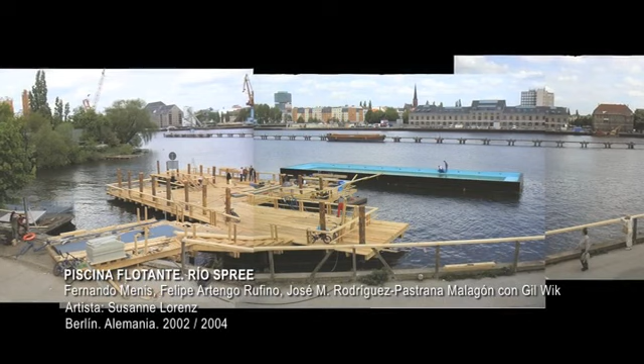The floating pool on the river Spree in Berlin recalls the old public enjoyment of the river through precisely the recycling of a barge for transporting coal.

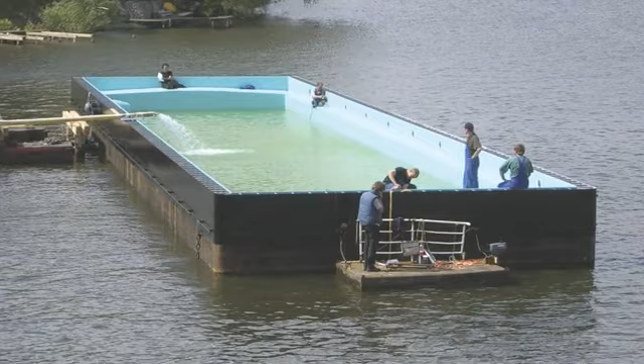As a first drop of clean water, the project reopens the possibility of swimming in the Spree, returning to an old tradition.

But perhaps it is in the conjunction of the House and the cultural space El Tanque where the reuse of materials acquires its meaning in a more accurate way.

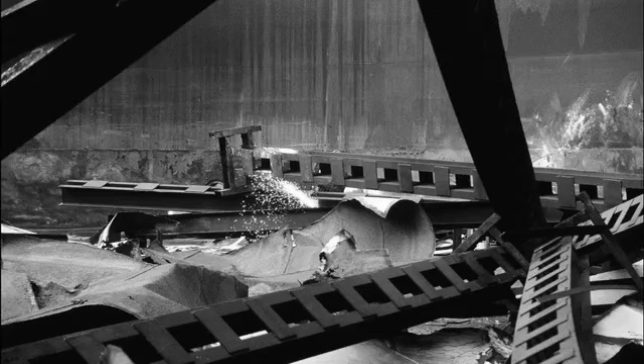The House building is done during the conversion of a gas tank of the refinery Cepsa into a cultural centre. Next to it, another tank is being dismantled, producing a large amount of waste. Fernando Menis decides to use this waste material in the construction of the stairs of his home.

The characteristic facade of the House, designed to look at the maritime city and breathe gently its air, has adjusted to the power of the sun and the breeze.

Nearby, the cultural space El Tanque is a good example of how the recovery of industrial elements enhances the scenic quality of space, amplifying the feelings that seize the viewer.

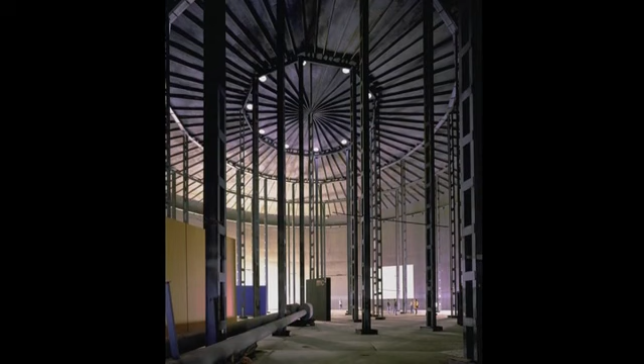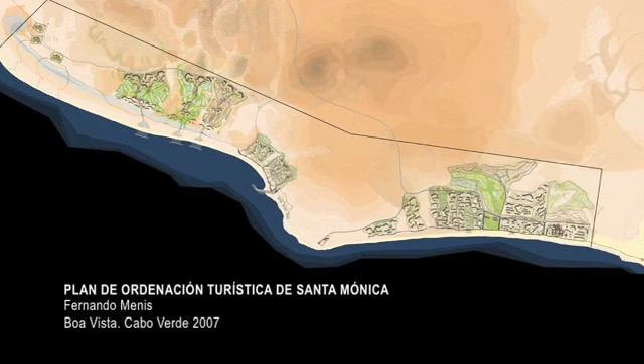The renewal of energy and matter takes on special meaning when it comes to reactivate economic places and processes related to tourism.

The project for the coastline of Puerto de la Cruz examines the current from the Atlantic to use its energy in the renovation of the harbour.

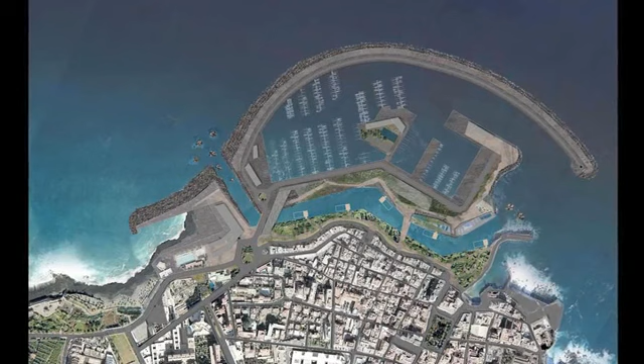An arm of the sea, the Canary Current, flows through the project area, reviving the area's tourism potential and increasing the quality of life for its inhabitants.

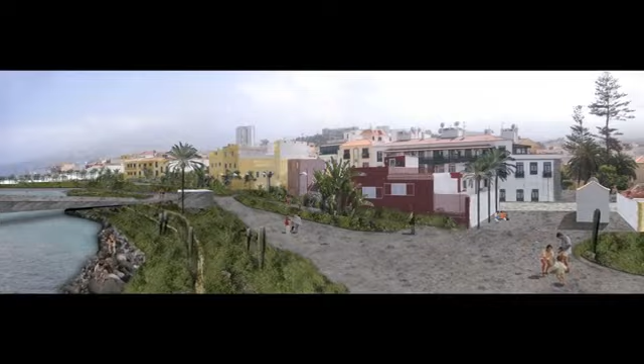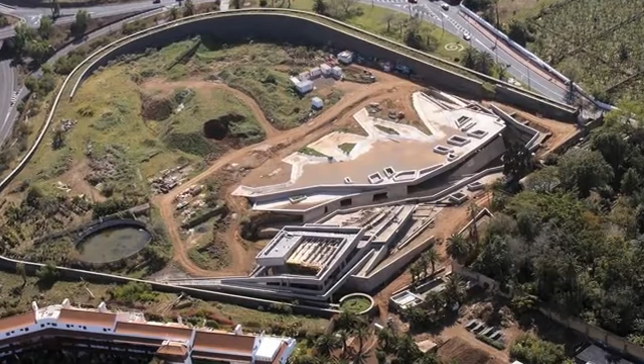The Botanical Garden in La Orotava, now under construction, will reactivate the surrounding urban fabric, completing its scientific character with other functions such as cultural, promotional and socio-cultural.

The treatment of topography also plays a key role in the project for the park Cuchillitos de Tristan. There is a pre-existent formation of rocks that is going to be used as a mirador, allowing matter to slide in a volcanic casting.

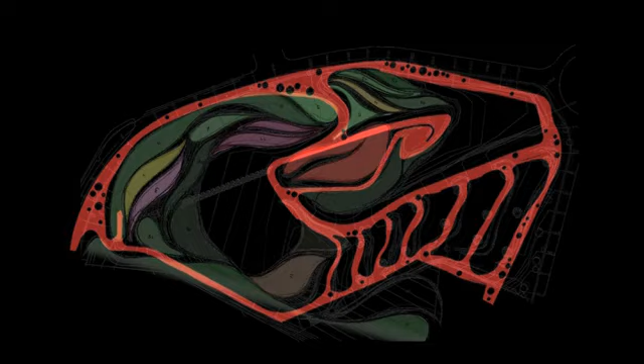Creating platforms that bridge the gap using a winding descent.

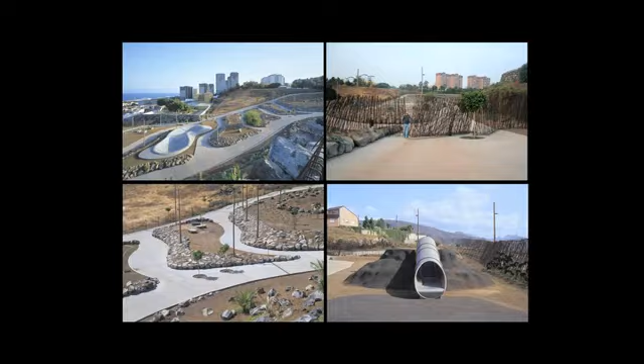The project for the new Sacred Museum in Adeje aims to the remodeling and expansion of the Plaza España, designed as a bridge between the social fabric of the village and the surrounding natural landscape.

The square is conceived with a clear visual and functional relationship with the ravine. Its role in venue is complemented by a permanent stage with the landscape as a background, giving it a great potential attractor both for citizens and visitors.

Are emphasized here once again the values in the context, advocating for quality tourism that fosters economic growth through alternative activities to those offered on the coastline.

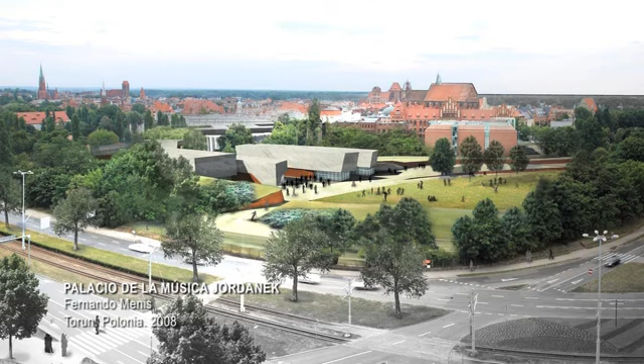For the auditorium in Toruń, Poland, the use of materials is the key to understanding the project. The plot is on the edge of a bucolic historic centre built in brick and limited to the redevelopment of the city.

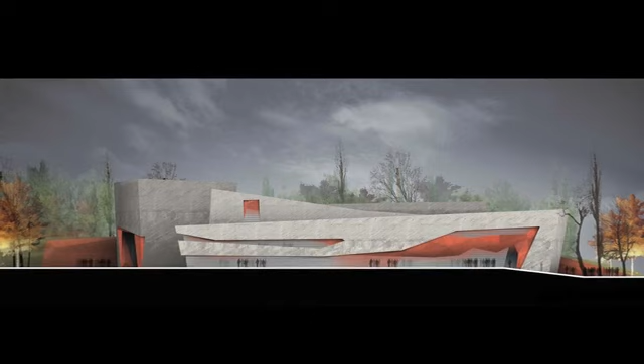The fusion of old and new is resolved through a brick lining and a rigid outer skin of concrete, very clear, which leaves holes in the interior that might appear organic like a crystallized magma.

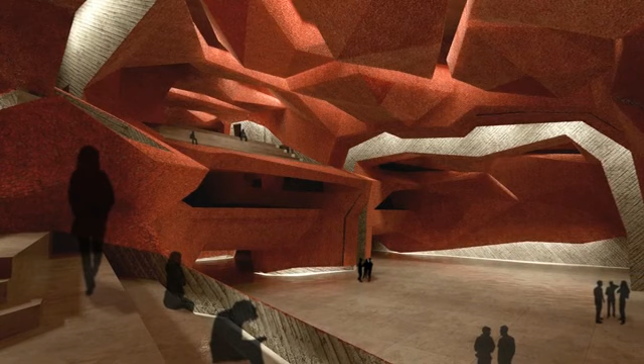The facade reinterprets the tectonics of the city and draws a parallel with the strategic location of the plot.

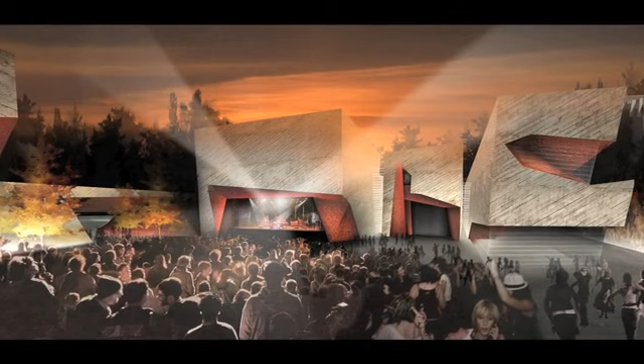Aurum House in Taiwan, in the AODI district, consists of two distinct volumes made of stone embraced by the land. Its strong presence is complemented here by geometric materiality, seeking the deployment of sensations.

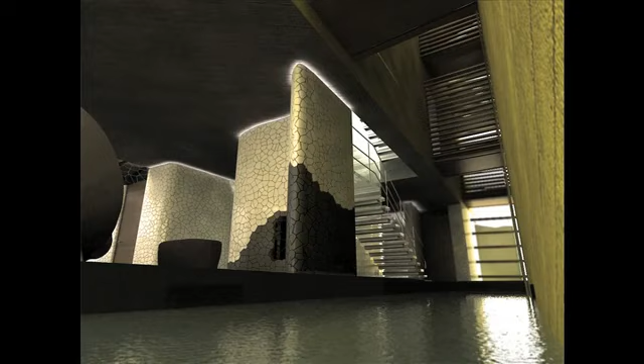The water flows through the house, sliding down the wall located between the strong gold pieces. Water and rocks, the flow and geometric force.

In Taipei, the project for the Garden Tower is designed by understanding the nature as lush fluid that escapes from the rocks.

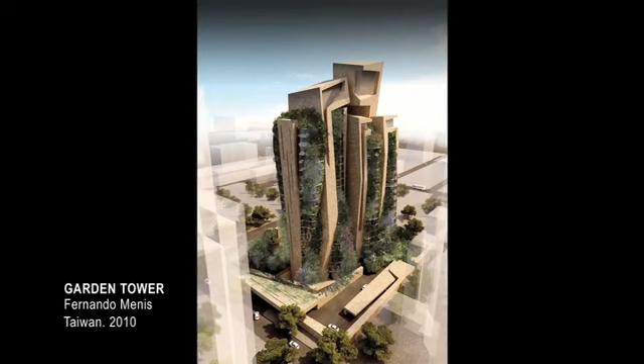Rocks that host the service cores and contain the interior space, structuring its organic form.

In the Church of the Holy Redeemer, there are two materials that make up the project: light and concrete. There is a delicate synergy between those from which emerges the strength of the building.

4 boulders resting on the ground, and between them the light penetrates, adding to its texture. Rocks and light, body and ethereal.

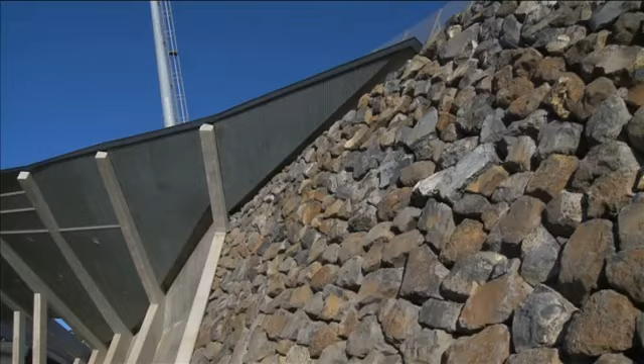A strong material presence has often to do with the landscape surrounding the project. In this case, buildings are designed as an extension of the telluric force latent in the environment, as if architecture was created by nature itself.

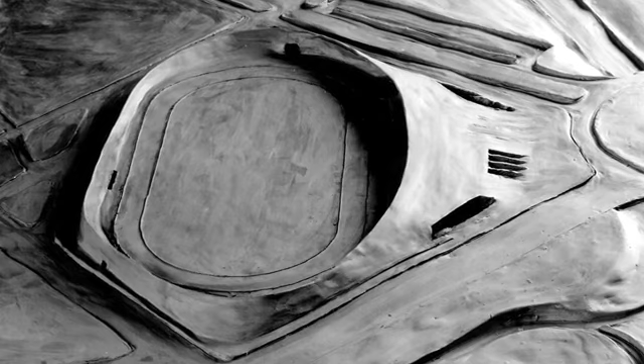The athletics stadium, designed as an extension of the topography, springs out from the earth as the crater caused by a collision. Through a single tectonic gesture, the stage is implanted in the territory, redirecting the energy of its own impact, manipulating the matter that had been removed, and using it in its settlement to solve the slope of the plot.

Also in the auditorium of Morrojable, it is difficult to determine the boundary between natural and artifice. A stone element that emerges out from the ground and causes a crack in the side in order to house an interior rich of volumes.

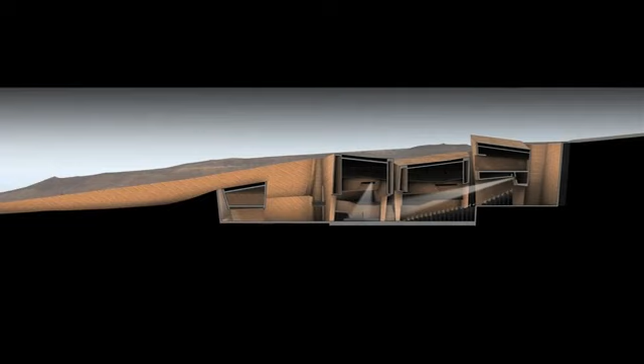A geological accident in complete synergy with the topography and location.

Perhaps the strongest building that resonates with the power of the landscape is the Magma, Arte and Congresos. The semi-desert landscape that surrounds it and the presence of the sea are the conceptual starting points of the work.

13 volumes emerge from the ground and contain the various program services.

Rocks that have been built with material taken from the plot itself, and to contain the flow of the roof, imagined as a liquid in motion.

Located on a high ground, the convention center is part of the environment and seizes its relationship with the ocean, the game of the sea between the rocks, radiating strength and expression.